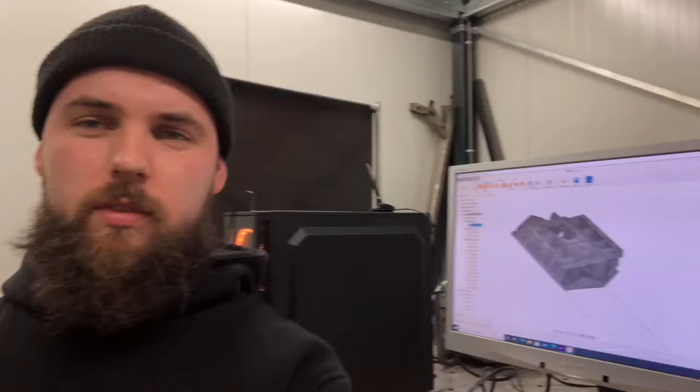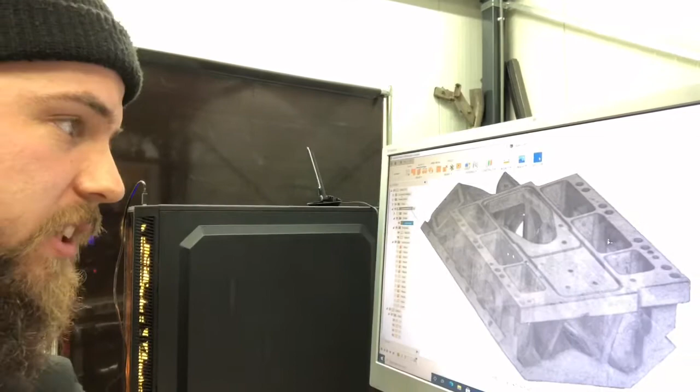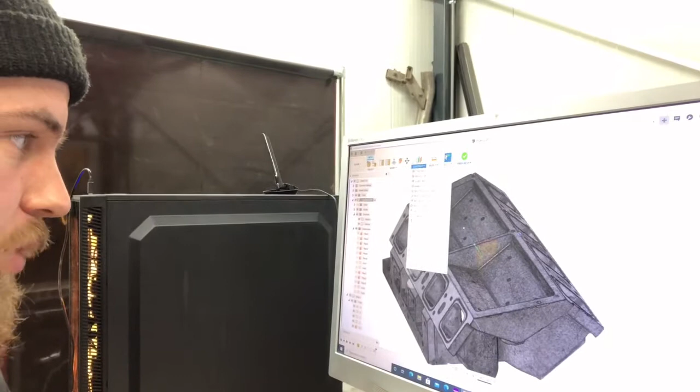So now we have a 3D scan, and what we want to do is on the STL, we can make surfaces and planes for construction purposes, so we can get exactly the same dimensions. You can construct planes by adding 3 points. For example, here you have the side of the intake for the manifold, and you just pick 3 points on the plane, and it will create a surface in between those points.

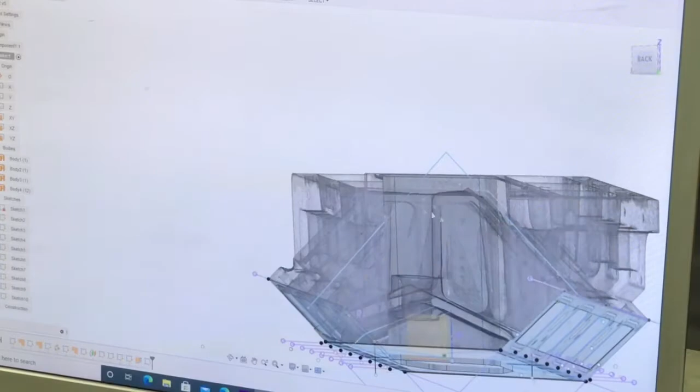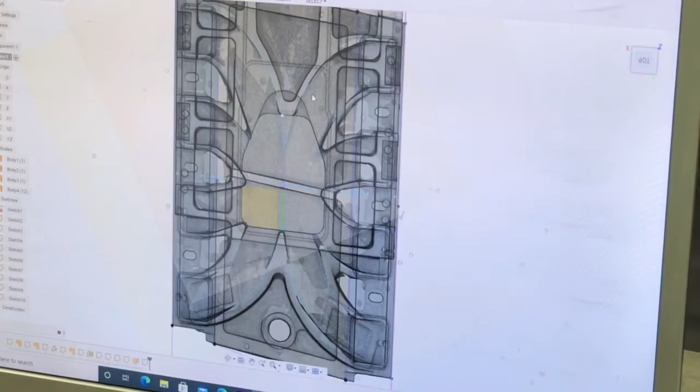Actually the nice thing about the 3D model is that we know how the product was made. What we can see, if we go to the back view, is that all the intake ports are on just 2 surfaces. We've got an inner surface, an outer surface, and then there's just a bunch of surfaces in between. If we look from the top, all the intake ports are just a draft top down, which makes it very easy to redesign the intake.

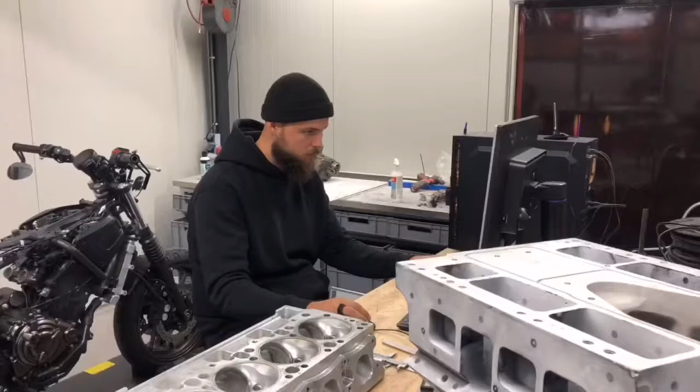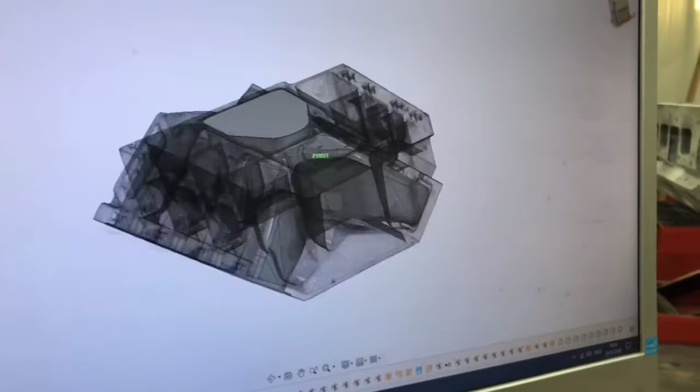I made the inner section of the intake, like all the tubes and tunnels and everything that goes on the inside, because that was actually the hardest part, and the part that needs to be the most accurate. So that's what I started with, and as you can see, I made it into a solid, and that's for a later stage. I've tested this already, and I can show you.

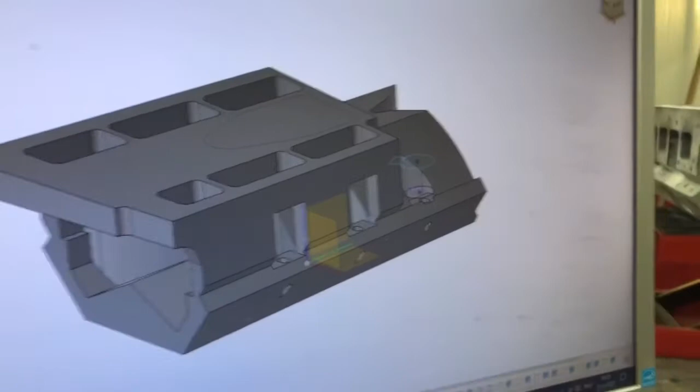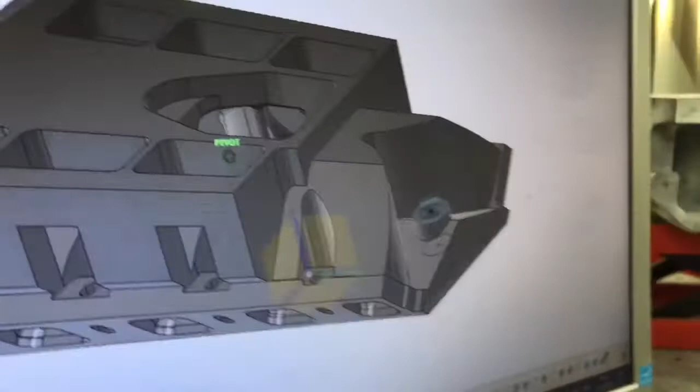I made a separate body for that. It's still under construction, still need to add in a lot of features, like all the holes and everything, etc. But what I'll eventually do is take the outer body and the inner tool body, and instead of joining them, I'll cut it out, and then instantly I have all the intake ports in the feature itself in just one click.

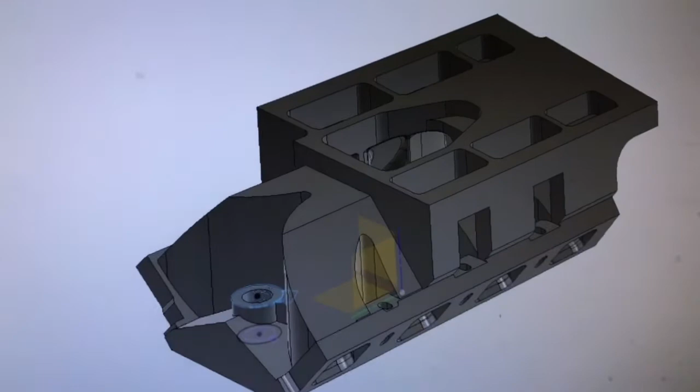It's looking good. Let's continue on it and try to finish it today, because that would be rather nice. I think I've been at it for about 12 hours so far. It takes a lot of time. So yeah, let's get to it. But first, I need some more coffee.

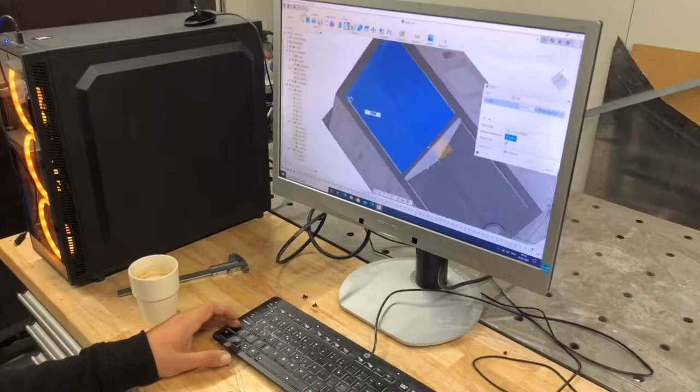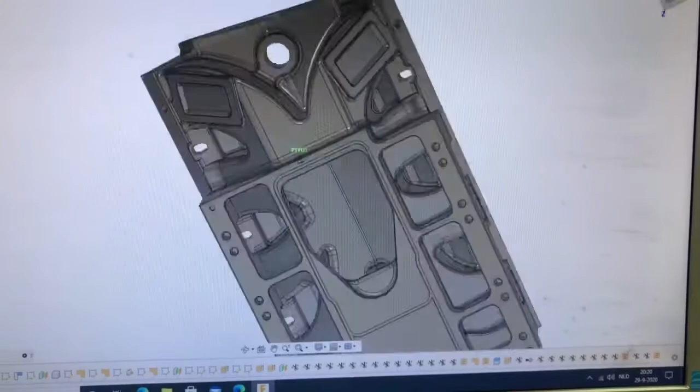So there we have it. It's 100% completely done. All the holes are in there, all the chamfers, all the fillets, all the measurements, everything is in the file. And it looks really cool because it's exactly the same as that.

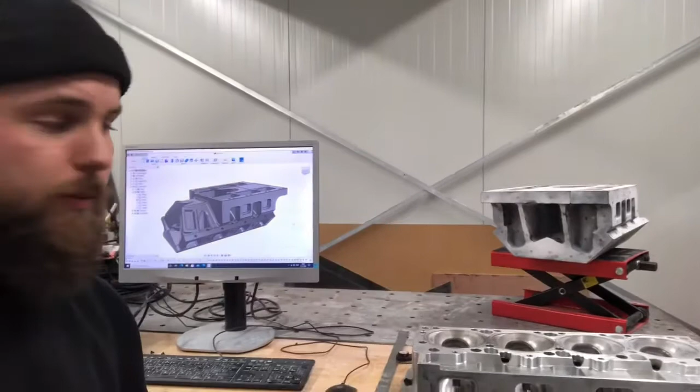So what I now need to do is export it as an STL, clean the intake, and my job's done. So that's it for this time. The intake's now done. Still need to do the cylinder head, but the basis is exactly the same.